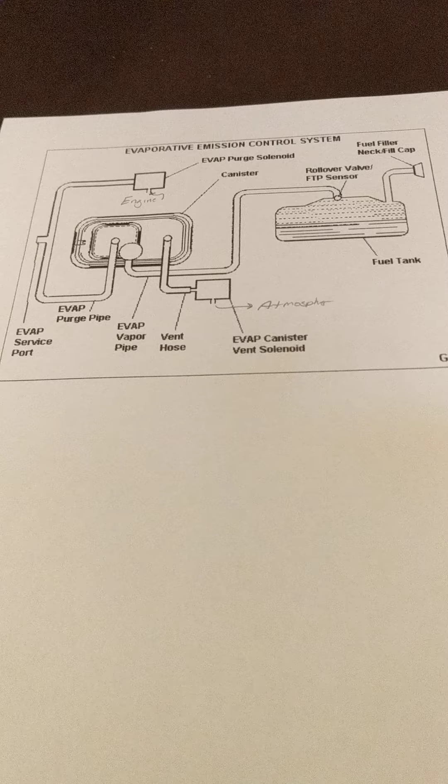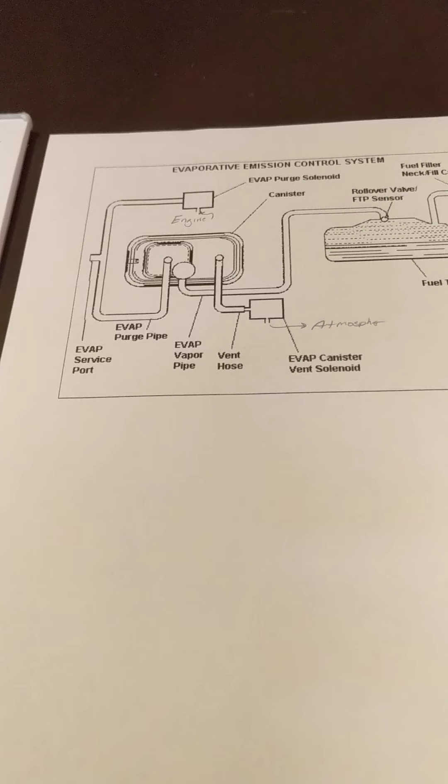Here's a quick video. I've had a P0496. This is on a 2004 Chevy 4.3 Silverado. The code applies to many years and makes and models. But P0496 is an evap system flow during non-purge. I've been fighting this error for a couple of years.

Finally solved it. Right here is the evap purge solenoid in the schematic. This mounts up on the 4.3. It's up on the engine intake. Not sure where it's at in the other vehicles.

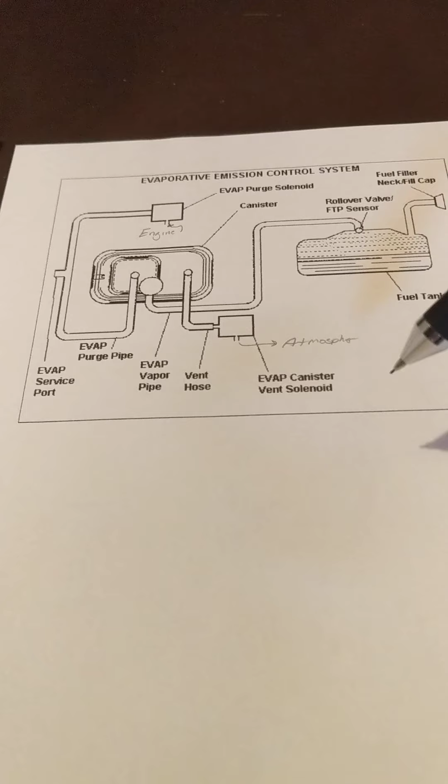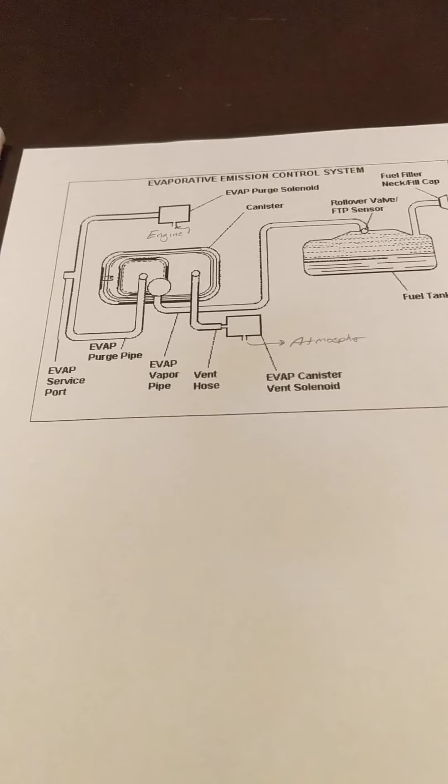I've had this problem for a long time. I had an earlier situation. I replaced the evap canister vent solenoid. Recently replaced not the fuel tank, but the fuel pump, and replaced the fuel tank pressure sensor, which I suspected to be bad. I bought this vehicle a few years ago, had the code.

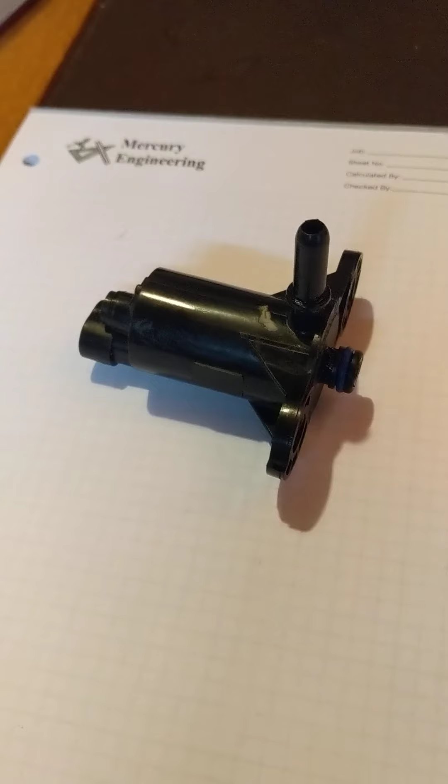Here's the purge solenoid right here, obviously taken off. Mounts on the intake manifold. This sticks down in the intake. Your hose here is running to the charcoal canister and then the electrical connection.

Again, I'm fighting this for a long time. This valve had been replaced by the previous owner, probably 3-4 years ago. So I didn't really suspect it. Key point on this valve, which I learned from another video: de-energized, this valve should be closed. So the way to check it, disconnect the valve.

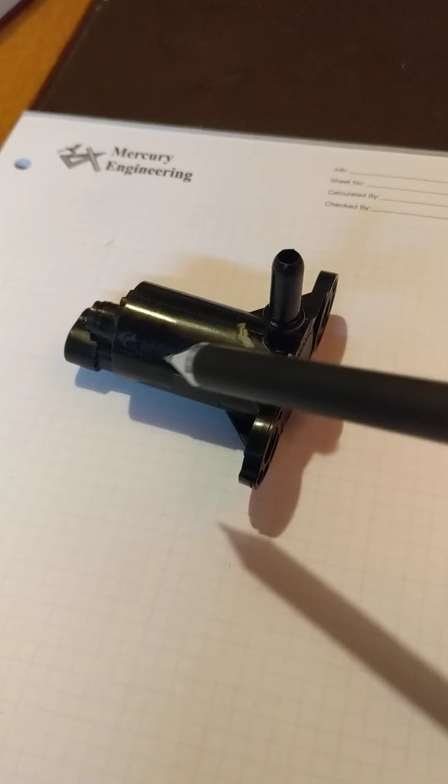I actually took the electrical connector out of it, and with the engine running, I thought I could feel a very slight vacuum. Actually, too much to really tell. Shut the vehicle off, hooked up my brake bleeder vacuum pump, could draw air right through it. So I knew the valve was bad. Took it off, replaced it. Taking a look at it, trying to figure out what the problem was.

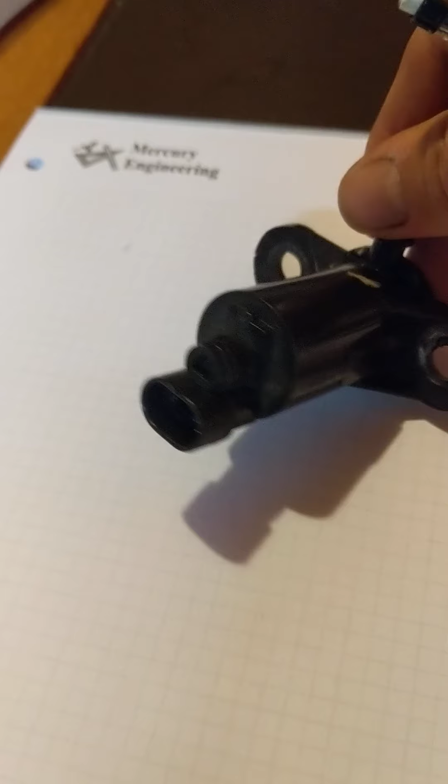Here was what made this problem so difficult to find. The valve is actually working. Gets a signal, opens and closes. If you put some pressure on it by blowing it, the air is coming out through the electrical connectors. So of course with the connector in there, it kind of seals this area up partially, which is probably why I wasn't getting any kind of rough idle or indications of a vacuum leak. But really tough problem to find.

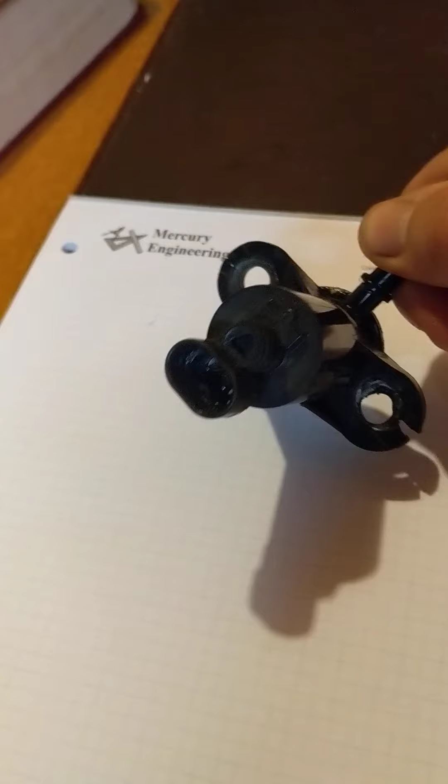Finally got it. So again, this no-name purge solenoid. I don't know if it was defective when they installed it. I replaced it with an ACDelco. Cost me only about $15 off of Amazon.

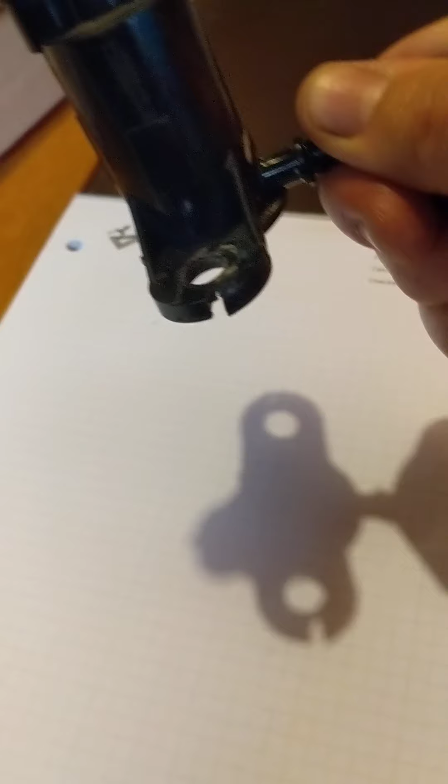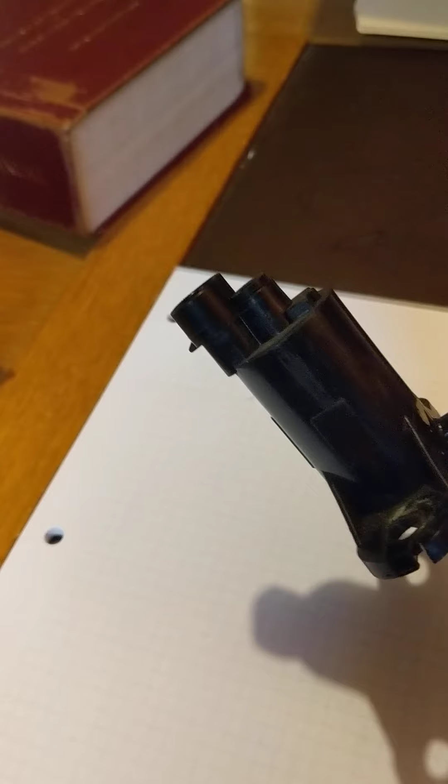Frustrating problem. You can see somebody had torqued this thing way down, probably trying to solve this problem. I don't have a smoke system, so I was never able to hook it up. I don't know if smoke would have gotten out of there or not, but again, really weird problem. Valve leaking through the electrical connector.